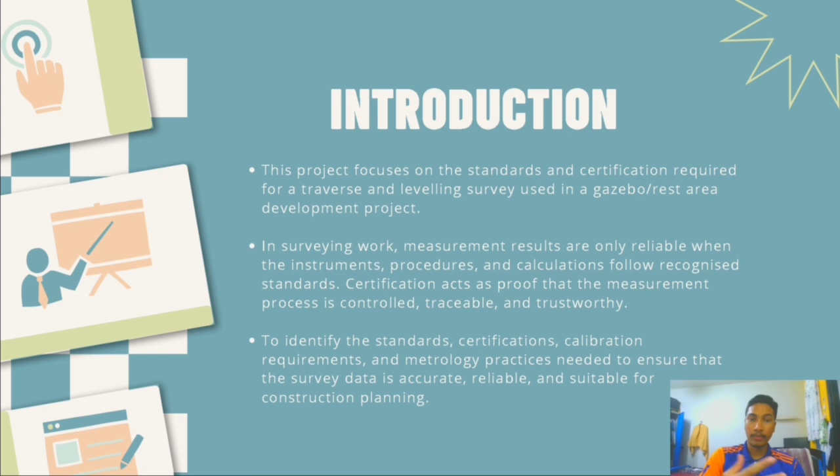And so to identify the standard and also certification, practices are needed to ensure that the survey data is accurate and also reliable. As for the background, as I mentioned just now, the project is based on UTM KL. In the previous assignment, traverse surveying and leveling surveying were used in measuring distance, bearing, position, and elevation.

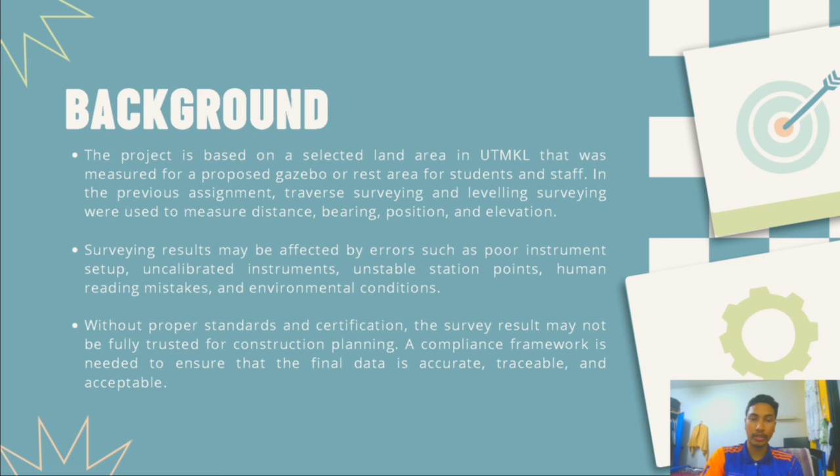So the surveying result may be affected by error, for example poor instruments, human reading mistakes, and also environmental conditions. Therefore, without proper standards and certification, the result may not be fully acceptable or reliable. In order to overcome that, a compliance framework is needed to ensure that the final result is accurate and also acceptable. So the key standards and certifications for our project are three.

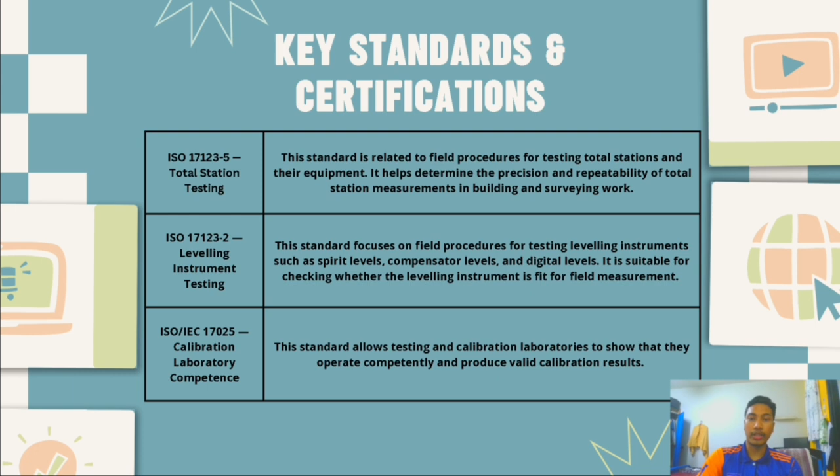First one is the total station testing. This helps to determine the precision and also repeatability of the total station measurement. Next one is the leveling instrument testing. This one is suitable to check whether the leveling instrument is fit for field measurement. The last one is the calibration laboratory competence. This one shows that they operate competently and produce valid results.

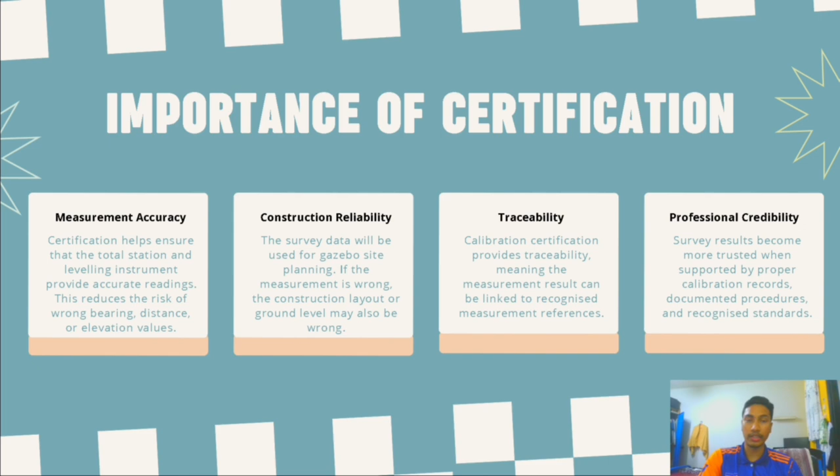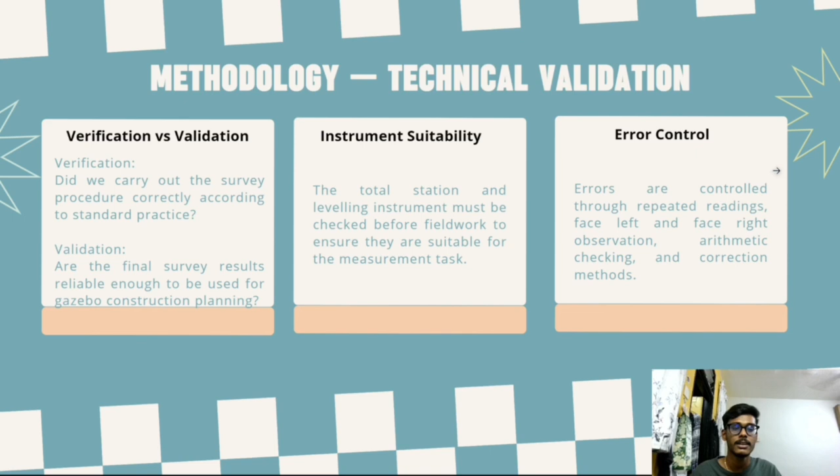And finally, error control. Errors are controlled through repeated readings, face left and face right observation, arithmetic checking, and correction methods. The next methodology is compliance procedure. First of all is calibration record checking. Before fieldwork, the team should check whether the total station and leveling instruments have valid calibration records.

Next up is standard operating procedure. The survey must follow a clear procedure, including station marking, instrument setup, observation, field booking, calculation, and also result checking. As for document control, all field book readings, calculation sheets, station sketches, calibration records, and also final results must be properly documented. And finally, for the internal review, the group should review the result by checking misclosure, correction values, and arithmetic calculation before accepting the final data.

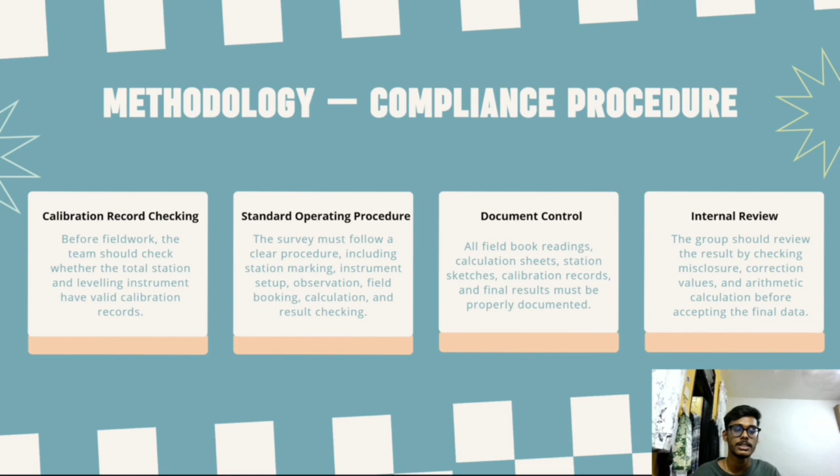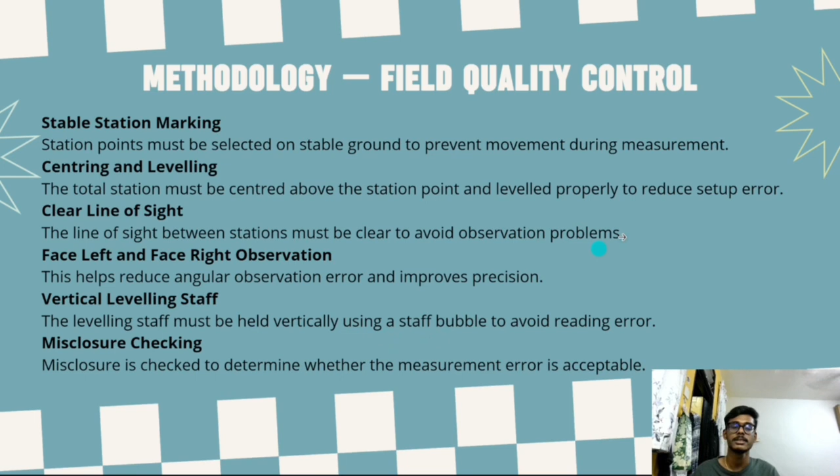Next up is face left and face right observation. This helps reduce angular observation error and improves precision. The fifth is vertical leveling staff. The leveling staff must be held vertically using a staff bubble to avoid reading error. Lastly is misclosure checking. Misclosure is checked to determine whether the measurement error is acceptable. That's all from me. Thank you.

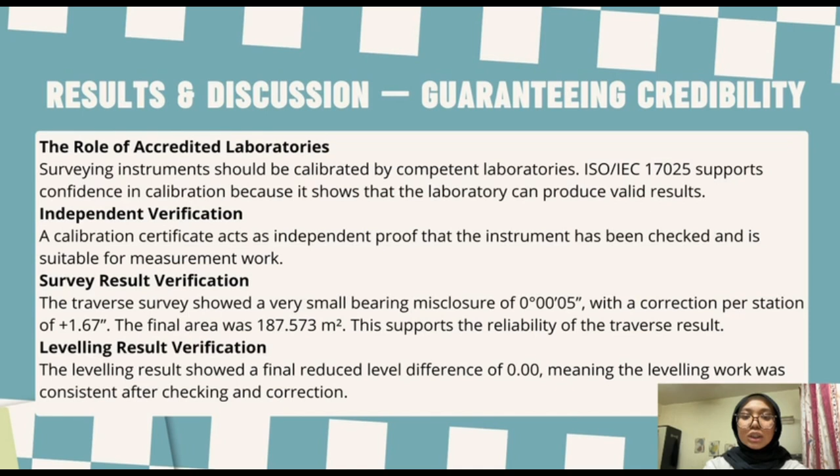Looking at our actual survey data, the traverse survey demonstrated high precision with a very small bearing misclosure of only 0°00'05". We applied a correction of plus 1.67" per station, resulting in a final calculated area of 187.573 square meters. Furthermore, our leveling result showed a final reduced level difference of 0.00, which confirms that our leveling work remained consistent throughout the checking and correction process.

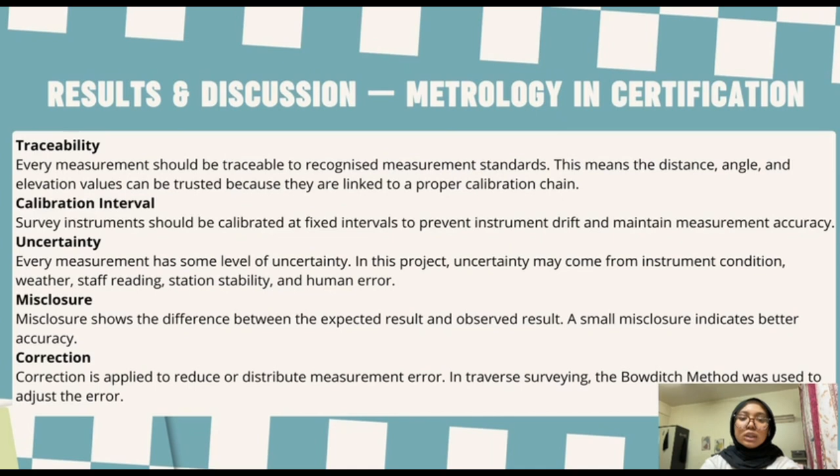In terms of metrology, traceability is a cornerstone of our project. This means every distance, angle, and elevation value we recorded is linked to a proper calibration chain, ensuring the data can be trusted for construction. We also recognize that every measurement carries some level of uncertainty, which can stem from instrument conditions, weather, or human error. To manage this, we focus on misclosure, where a small difference between expected and observed results indicates better accuracy, and apply necessary corrections. For example, in our traverse surveying, we use the Bowditch method to accurately adjust the error.

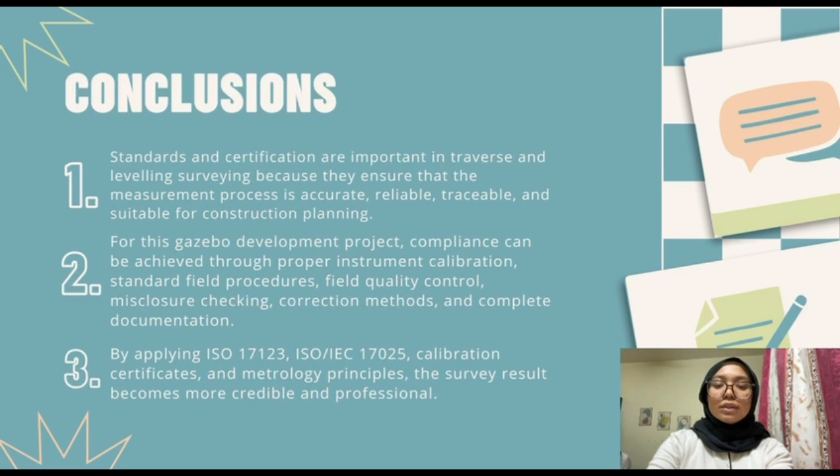To conclude, standards and certification are absolutely essential in traverse and leveling surveying. They ensure the entire process is accurate, traceable, and ultimately suitable for planning our gazebo development project. We've shown that compliance is achieved through a combination of proper instrument calibration, standard field procedure, and meticulous documentation. By applying metrology principles and standards like ISO 17123 and ISO 17025, we ensure our survey results are both professional and credible.